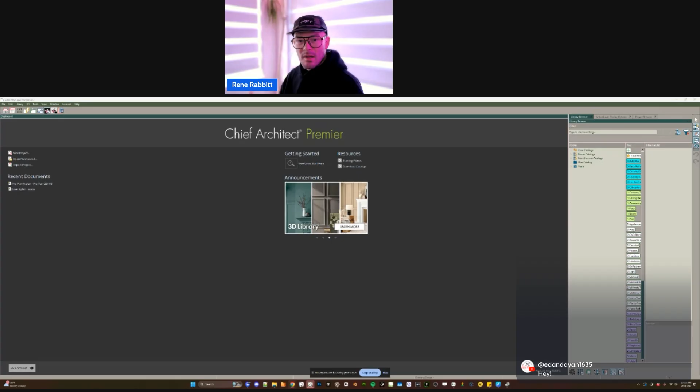Cool, so what can I go over? I'm thinking the first thing I'll go over is something I was going to keep and reserve for my membership, my paywall YouTube, but why not? I don't have anything else to talk about, so let's show you something cool that I would usually reserve for a special audience. I'm going to get in and start a little template here.

I'm going to show you something. My templates, the way I build them out, I guess it's sort of a shameless plug, but one of the really impactful things you can do in X17 is make it so that your plan file, a base plan file, is already being sent to a bunch of different sheet sizes automatically, so that when you start drawing, those different layouts are being populated. So you can have different layouts for different builders, if you will, or different layouts for different scopes if you want to.

It may seem a little complex, but all you need to do is build out a project, and when you're done with that project, gut it. Then figure out how to save this as what I'd call a template project, keeping in mind it's not technically a template. We will never go to a file menu to access this — we'd just go to our project browser and copy a project that's already built out, where we have a plan file being sent to multiple different layouts.

Now that's in a very advanced realm of figuring that out, but I wanted to lead you down that path because I just had a training call where a gentleman was discussing how to automate, how to make it so he's doing less work. This is one of those ways, because what they were doing was having to come up with a lot of different layer sets, using them to drive one layout so they could print a build set for their builders — more like an instruction set — versus their permit set, versus some kind of design review set.

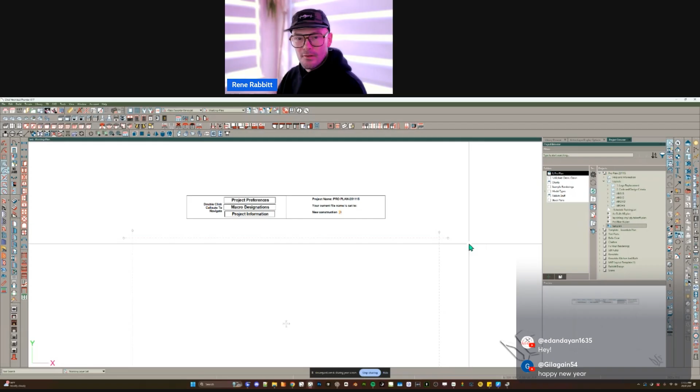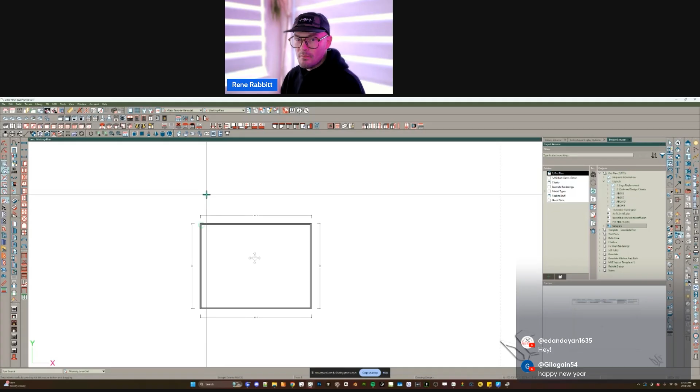So I'm just going to start with a really simple 4-wall room here. If you're on a Windows machine, I always like to mention this — I think it's such a huge tip — I'm going to use what are called mnemonic keys, and I'll take a second to explain what those are. Mnemonic keys, unfortunately, we don't have this on Mac, and we've never been able to create a workaround on Mac, not to the extent that it works on a PC.

Mnemonic keys are when I tap my Alt key — I want you to see my cursor up here, you see the top menu items. When I tap my Alt key, just tap it, don't move your mouse anymore, hands off your mouse. When you have your hands off your mouse, you tap your Alt key. Notice that all the menu items on a PC are underlined here — we've got single letter underlined words.

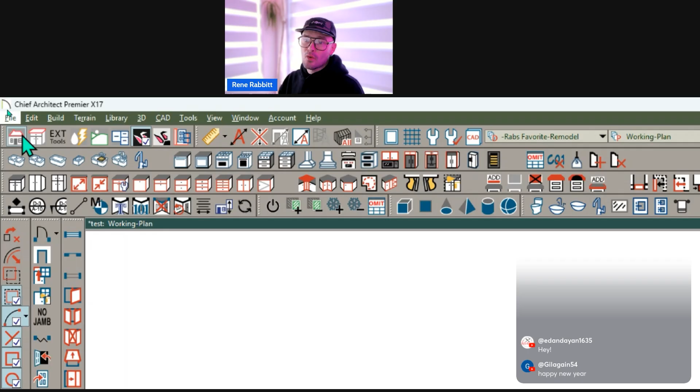So if I want to build a second floor very, very quickly without ever even touching my mouse, I could go Alt B for build, O for floor, and I could just hit enter right now, or I could hit N for build new floor. I'm just going to hit enter, and then I know if I hit enter twice more, it's just going to copy basically the same configuration from one floor to the next, and now I have a second floor. Isn't that cool? So then the next thing, what do we do here?

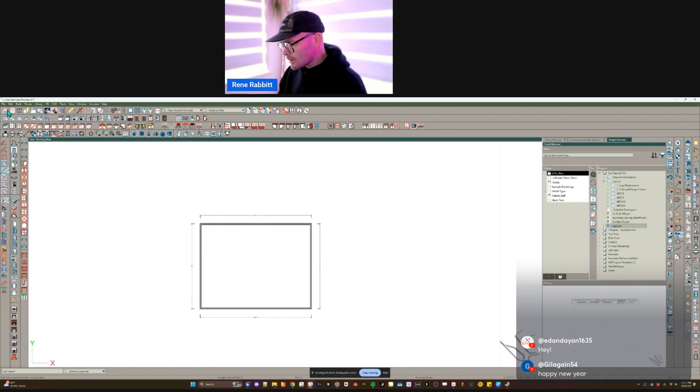We want to basically set this room up so that it's got no roof over this room, right? So we come in here in the structure, say that it's no roof over this room, and we'll press OK. And then the next part of this is just kind of setting up these walls.

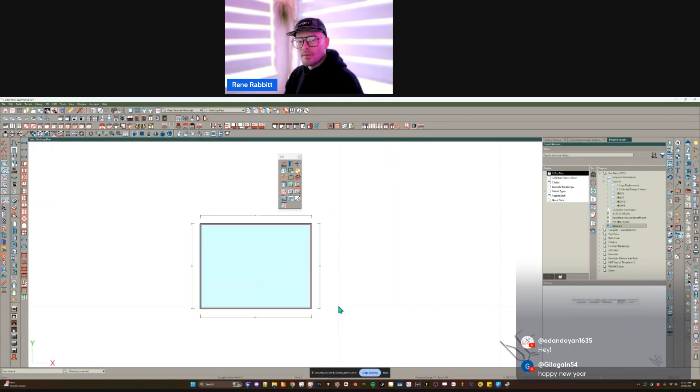Now, I'm going to cheat a little bit — I already have a tool that builds a parapet, I just want to show you how simple this is. Let me go ahead and pull a perspective overview here, and I'm going to get into my library. I want to recreate this, and I'm going to probably do a better job this time around. Here we go — I've got a little parapet built here.

So if I just spray this room, look what happens. A couple things happen that might be interesting. One is we've got a cap, and two is that we've got some kind of cant in the base here. And then three, you can see that there's some new texture being applied to all the walls and the floor. This is what's called a style palette, right? It's a room style palette.

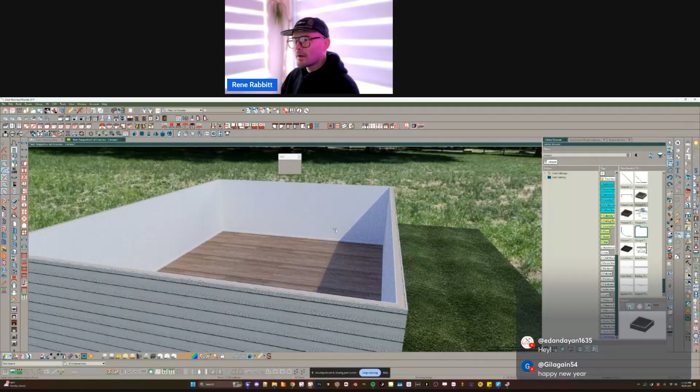So it's saving some configurations about the room, and then it's applying that as a single click action so that I get to just target a room. We could do this in 3D or we could do this in 2D. The same effect would happen if I just back out one — we can see the previous room, no cap, no wall cap, etc. Now if I go here and I'm in the second floor and I've got that tool active...

You can see this is our scope tools right here in our edit menu. My edit menu is floating in the screen. I just get to hover over this — that's my highlight color right there. Hover over this, click, and you're going to see this updates. Okay, so it works either in a 2D plan view or it works in a 3D view as well.

So the next thing is I want to make this a little bit more detailed and save this back as a new style palette.

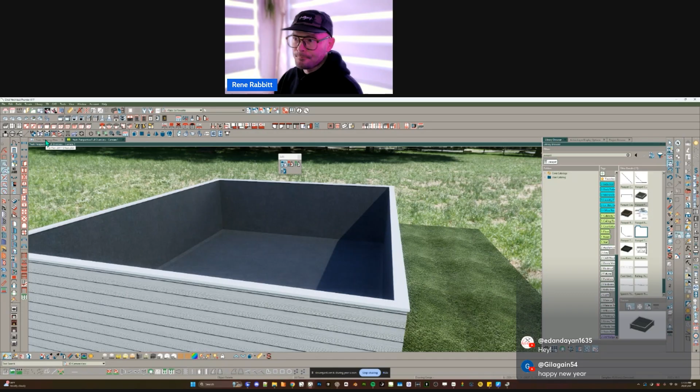So what I'm going to do is pull up a little cross section, a backclip cross section, so we can see what this is looking like currently. And then I have a parapet detail here that I can work off of.

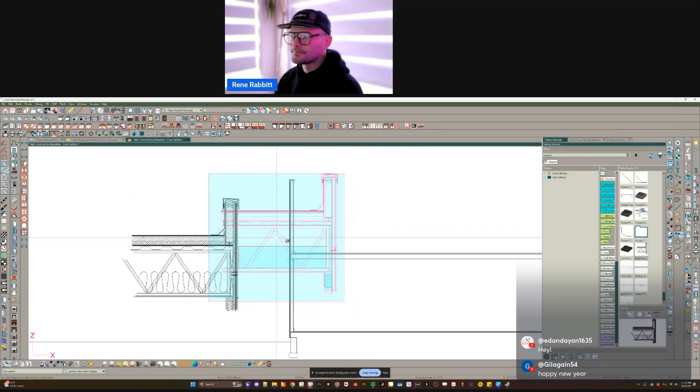Maybe I'll recreate this from these different moldings here, so we can see what was happening. There's just one simple molding in here, but we want to make this a little more complex. I might make it so we're creating all these different moldings and applying them in that style palette tool. I think we could do that pretty quickly for the most part.

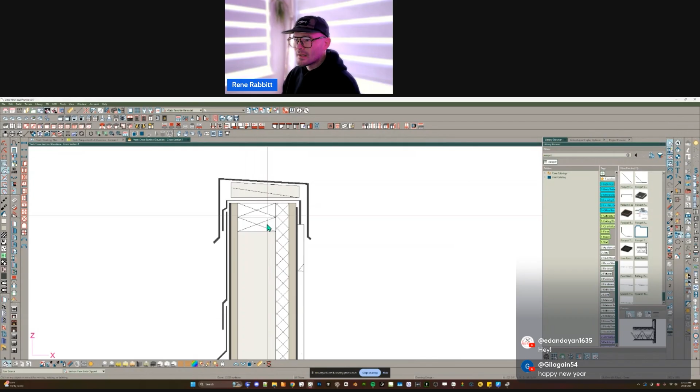Now, I'm not sure how interesting it is to see me draw all these individually, but given that this is just a CAD block detail.

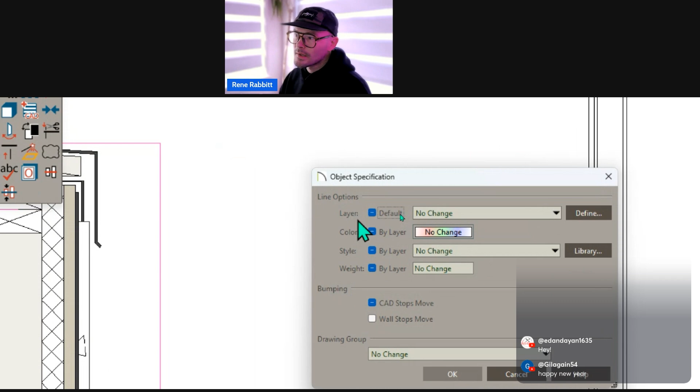I'm going to make sure that all these are set to a default layer. If you didn't know this, when I unblock, everything in that block is currently selected, so I could go here and conform the layer just by changing it. This minus sign indicates that some of the selected layers are default and some are not. If I click this once, it puts a check mark there, setting it to that CAD default layer, so now I know I'm displaying that in my current layer set.

Next up, it looks like I already have these moldings created. Now the scale of this is wrong, so I might want to mess around with the scale to try to get it to a uniform scale.

Now, I do believe I started drawing this, and I think it might be more interesting for you if I don't sit here and watch me draw a bunch of moldings, but instead power through it and explain the overall goal here. Let me see.

I think I have a series of moldings here in something I've called 'sort.' Let's see if we can find it real quick.

Talk amongst yourselves. Hopefully you guys can hear me okay, let me know if you can't. Well, I was really hoping...

I had these moldings already drawn, because that would have been awesome. Would have seemed like I planned this whole thing all along. Okay, I do have it.

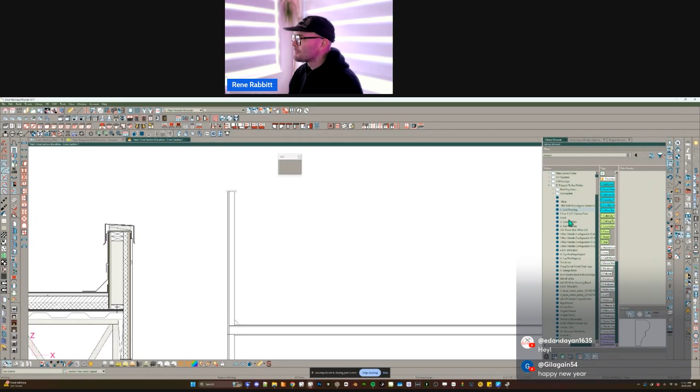So here's what I'm going to do. I have these moldings in my catalog. This would have been a lot easier if I just typed in 'mold.' Let's see what I'm typing here - molding - and you can limit your search to a specific type.

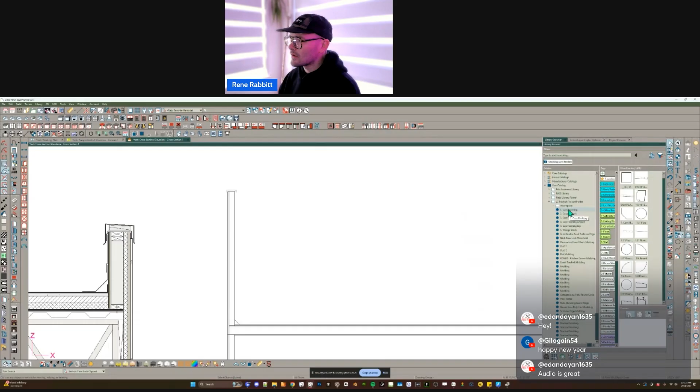If you come down here and see this icon, this is saying hey, I only want to see moldings, okay? And then I can find my sort section here, and we can see I started drawing these. I was just prepping for a video I was going to do about this.

Someone said the audio is great.

Now, if you didn't know this, you can always modify a molding profile by right-clicking in your library and saying place molding profile. This will place this as a CAD block, okay? So we can see what's happening here - so there is a cant flashing.

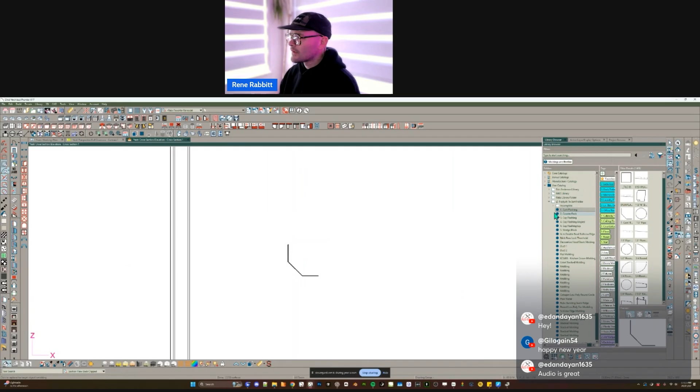I'm going to do the same thing with this counter flash just to see what this is looking like, okay? So we can see this is going to line kind of like this, right? Here's our cap flashing - that's going to go at the top.

So again, if I didn't put place molding, it thinks I'm just trying to draw a molding right now. It would draw a molding line if there was a snappable point it could work from, right? Which is a little more difficult in a cross-section view.

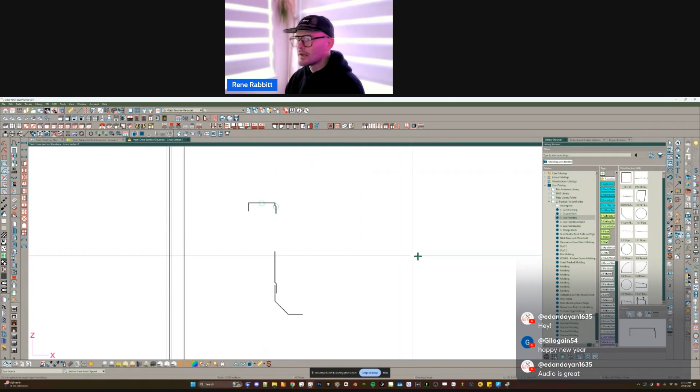And so here we go, place molding profile - just click in place, cap flashing angle. Let's place that molding profile. This one goes over the top of the first one.

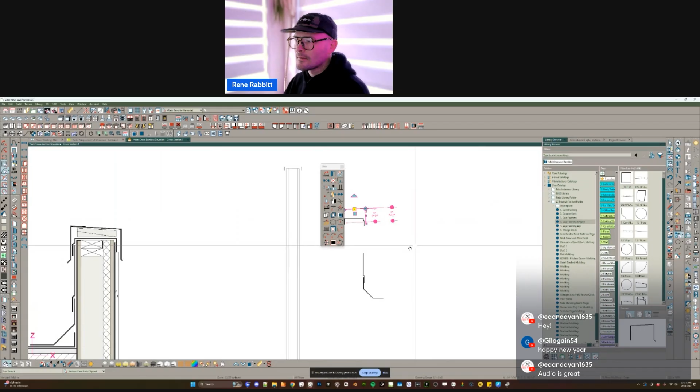Now here's the real big trick I was going to implement for this particular detail. There is no way to get a 2x4 that's been chamfered like this, cut down like this, and angled like this. So I did think maybe it would be interesting if I made my own molding profile to just look like that 2x4, because the only time we're going to see it is in a cross-section view.

So what happens if I just drew this out? Let's see how I drew this real quick. That's simple enough - this is a disconnected molding profile.

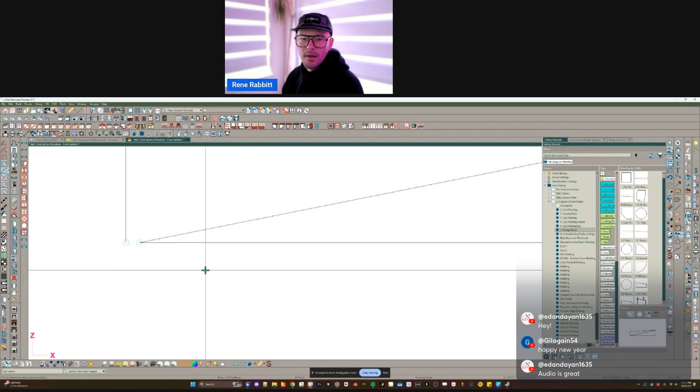You see there's a little gap here, which doesn't bother me all that much. Once we turn line weights on, that just looks like a cut down 2x4. So that works pretty well.

So it looks like I have all these drawn. What's the next step? Now we've got to figure out how we can align all this. There's some complications and some tricks to this that can be a little bit challenging. So let me get into this room specification.

I'm going to select the room, open it up, and get into the moldings section here. We can see we've got some moldings in here that we're going to replace. And I'm doing this on the fly — this is not practice, so I'm going to screw up a little bit probably.

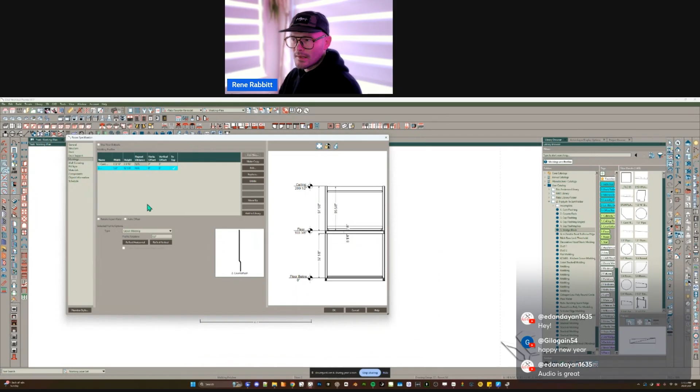All right, so now I can get into where I've got these flashings. Should be easy enough to just start by loading these in, I would say. It's automatically understood that was some kind of crown molding. It's not going to understand that this is a base molding — it thinks it's a crown molding. That's okay, we're just going to set this to base molding.

You just do that in the type section. I want you to notice this, base molding, okay? If we just left it blank, who knows? If you set it to crown, what happens?

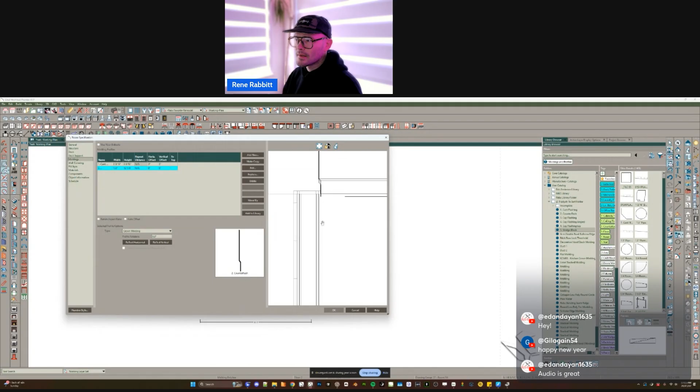When we set it to crown, it's going to place a check mark here to top, all right? And so when we get a preview of this, we're going to see that — here we go — this is how it's placing to top. We unchecked to top, look what happens. It's referencing the bottom, okay? It's still being designated as a crown molding, but it changes its origin point, all right?

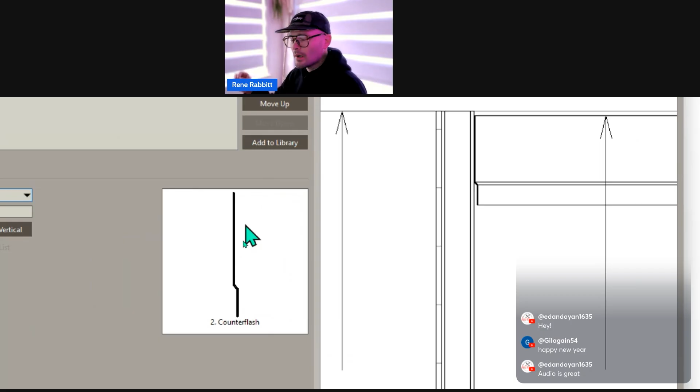So this one actually is going to be a base molding, and then we're going to change some offset. Now, another thing happens when you change the type classification. I want you to see this — notice our preview, it's just showing this molding. That's because no other moldings are classified as crown right now, okay?

Now, if I were to change this back to base molding, notice something — we see our cant flashing here. Why is that? These are both classified as base moldings. So this is a way that you can see how these are interacting with one another, all right?

And so then if I change some kind of vertical offset for this, let's just say I'm doing a vertical offset of maybe about 6 inches or something. I didn't take any dimensions here, but look at that — now I can see how this is working together.

Pretty cool, all right. Now, this is not going to be a perfect flashing setup for one very specific reason: we aren't using what are called 3D moldings, okay? We're not using a molding profile that was generated from a 3D symbol. There is a benefit to doing that for this particular molding.

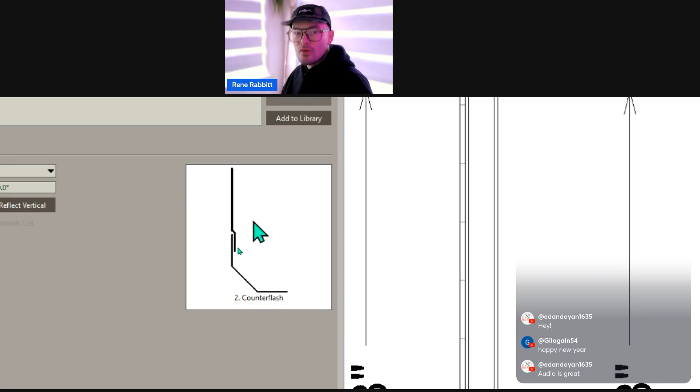When you draw a 2D CAD symbol and convert that to a molding, it cannot be stretched in any axis, separate from just being uniformly stretched just by resizing it, okay? So we can't make this upper portion here be taller without it just being skewed in every direction uniformly, okay?

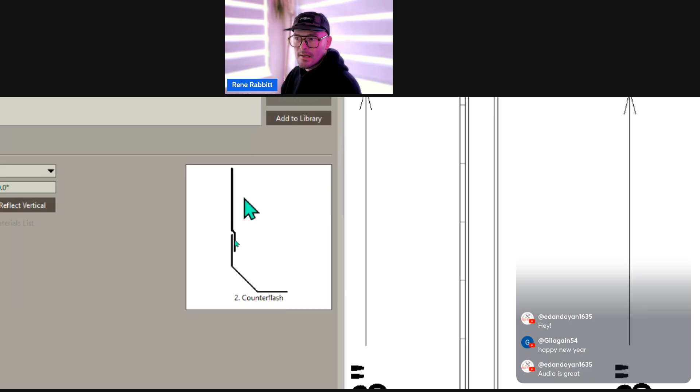If instead I were to have converted this to a solid that was maybe 12 inches long, and then from there converted it to a molding, then I get the option to put in a stretch plane. And if we know about symbols and how stretch planes work, we know that we could put a stretch plane 4 inches up in the Z here. What that would do is create a uniform cutting plane so that if we resize the symbol's height, it would stretch by just duplicating the geometry around where that stretch plane created a cut line, okay? And so that would make it so that we could change the height of this based on the height of our parapet wall. Very cool.

Maybe if we've got some time, I could show how that all works. All right, so let's get into that next molding here. And notice I numbered them — that was just to make it very easy for me to go through here one by one and just put these in place. You can obviously rename them after the fact, and that would be just fine.

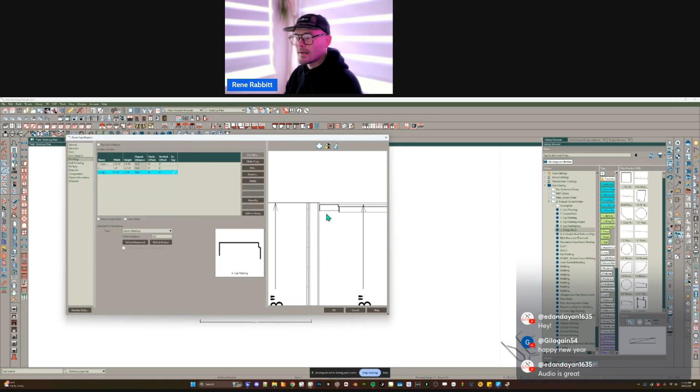So here's my cap flashing. Let me put this in. And so this one is going to be crowned, so I'm going to leave that the way it is right now. We are going to need some kind of a negative offset, right? But I'm going to leave this for right now, and we'll get to why in just a minute.

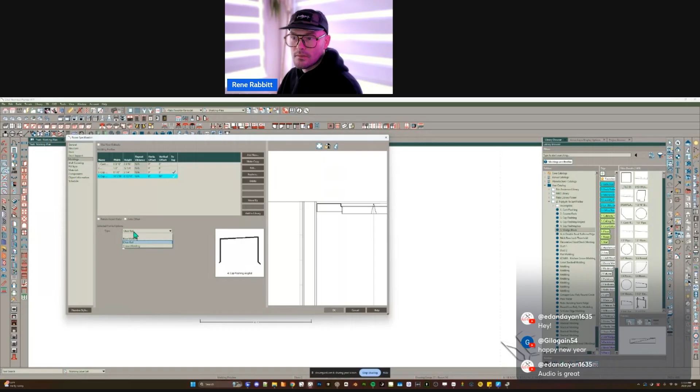Let me go to the next one, just loading these up, and I'm going to use the angle. Notice that I have one that's straight and one that's angled, so I'm going to use the one that's angled. This thinks it's a chair rail because we've already got a crown molding, so I want to make sure that it's set to crown mold. Now we can see how it's orienting itself compared to that other cap flashing there.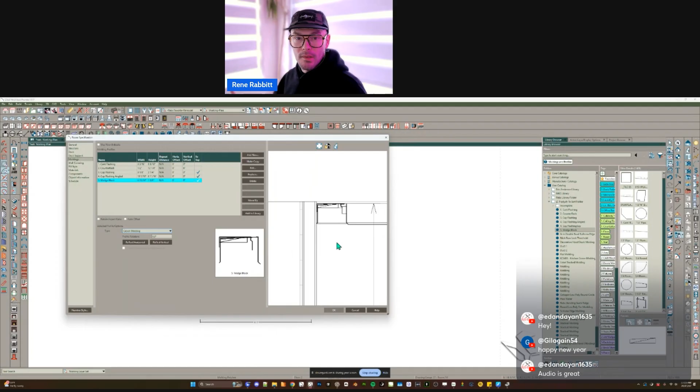And last, definitely not least, my wedge block is also going to be a crown molding. Now, how do we get these caps up above my wall assembly, where they need to be? In particular, that wedge block.

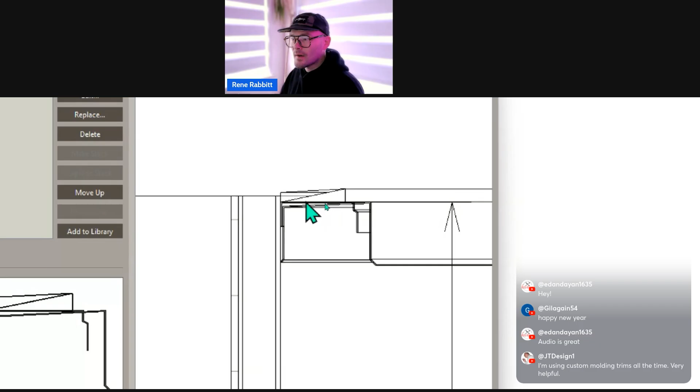So I can set this, I uncheck that to top, and we can see now that moved and changed its reference point. But I still need this to go up a little ways because it needs to sit up above my wall here. Right now it's sitting just below my wall. It needs to be up above, especially if I want that cross-section cut to be perfect.

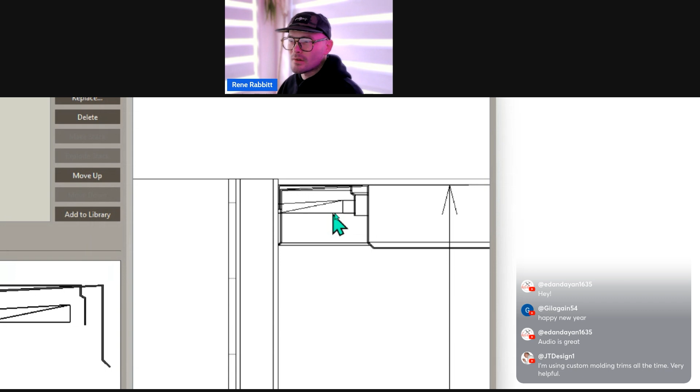So here's what I want to do. I want to create a vertical offset, so I'm going to say, hey, I want this 3 inches vertical offset. Well, look at this, Chief Architect decided at some point that we're going to flip what the offset is based on, depending on what we're working with. I still find this to be very, very confusing. It's not quite intuitive. I would love it if Chief changed it so that no matter what, positive is in one direction, negative is in another direction.

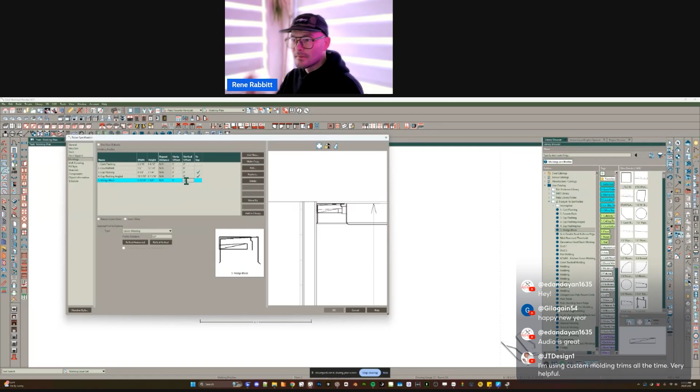So we just got to keep in mind here, when we're doing something that is considered a crown molding and you put a positive vertical offset, that means it's actually going to move in the negative Z delta. So if I want to go positive Z delta, I put -3. I want you to notice something: it moved up here in our preview, but it did not move up here in our preview in the room. That's very important to note. Why is that? Well, according to Chief, we can't move any given molding profile past the ceiling plane height here.

And so it won't move up above that ceiling plane height, and it's based about the total molding size. But there is a trick about this, we can make this work. So all I want to do then is concentrate on this preview right here - this is what's important to me. You'll see how this works out in just a second. So I'm going to go to -1 actually, and then, actually, I just want this to go just above this cap flashing. That's what's important right now.

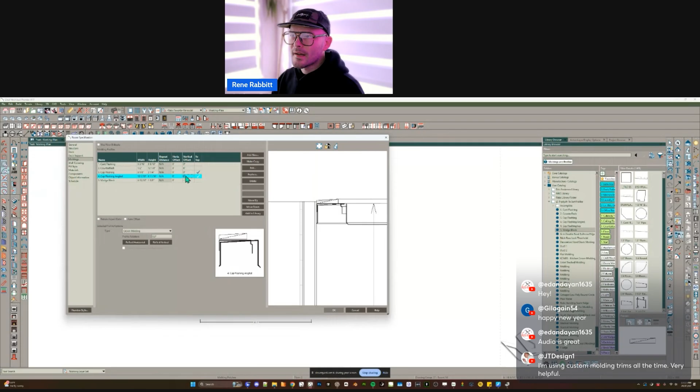And I keep losing my mouse because I'm zooming. So let's just go negative, maybe 1/2 inch. And this is just going to be a guess and check, 1/4 inch. That looks pretty good for me for what I want. If I pull a cross-section camera and look at details, I'm ignoring this other one. In fact, we could put a big offset for that angled cap flashing just so we can see it. There we go, so here's what's happening so far.

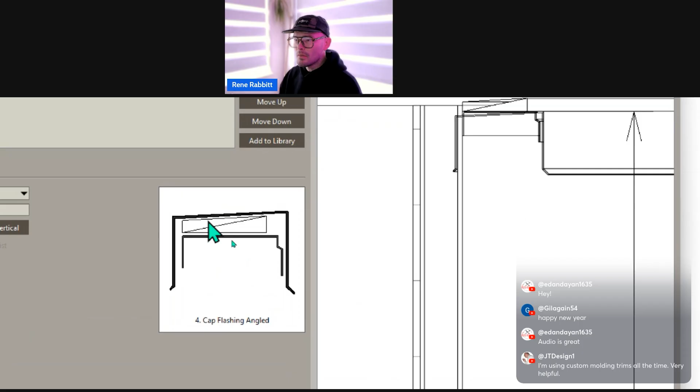Now that top cap flashing, I need some kind of horizontal offset, just a little bit here. So let's go -1 for there as well. That's looking a little bit better. And then I have maybe 2. That looks pretty dang good. Maybe I want the spacing to be a little bit more perfect here, right?

You'll be playing around with these distances, certainly. Or you could bring up a CAD detail and dimension it all out so that you have some kind of reference - that probably would have been a smart thing for me to do. So let's see, my horizontal offset, I'm going to go -7/8 instead. I'm going to center that up a little bit more, and I'm going to go -2 and 8. Oops, yeah, that worked out. So this looks pretty good.

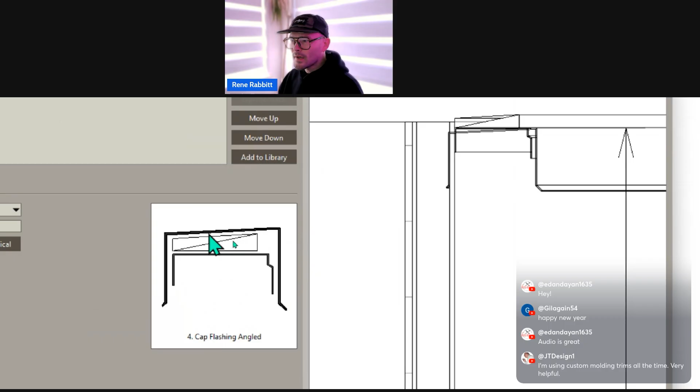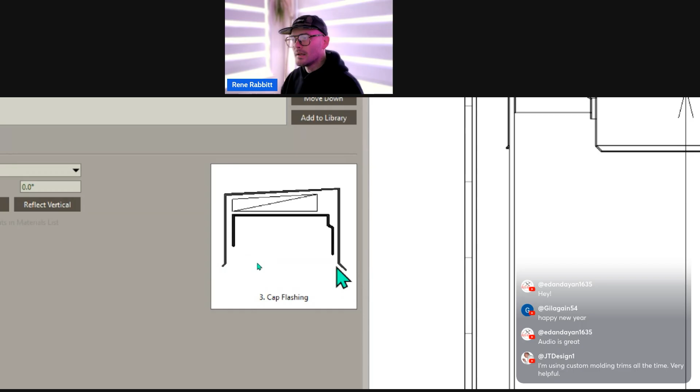Now, it looks terrible over here in our preview, and that's true. If we were to go take a look at this in 3D, this is what it would look like, not this. But the trick is this: because we have this really tall profile, and we know we can reference to top instead of to bottom, or uncheck to top, that means we can offset this based on the bottom of this profile. This whole assembly, if we were to make it a stacked molding, would reference based on the stacked molding's overall height, which means we can shift this whole thing because we've got this larger profile. Let me show you how this works.

We're going to see what happens in the preview once this all pans out. So the one thing I kind of screwed up on here is this cap flashing. Both of these, I should just reference the bottom. It's going to make it easier for me to assemble this whole thing, I think. Let's try it without.

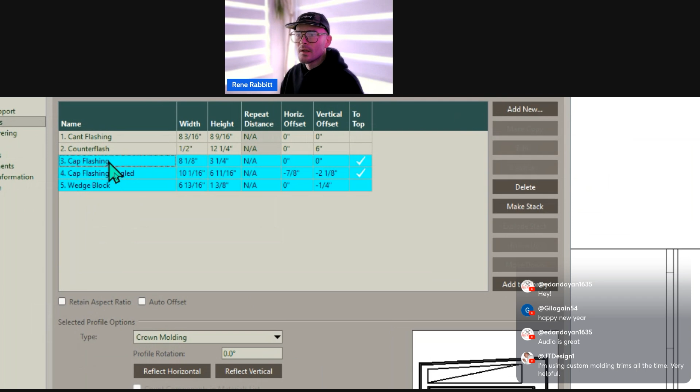Let's try it with. So I'm going to shift select all of these moldings. Select the first one, shift select the last one, right? So shift select all of these. And over on the right-hand side, I get this make stack option. So we can see what happened here. Now we've got this stacked molding, and we've got those different moldings associated with it in that stack.

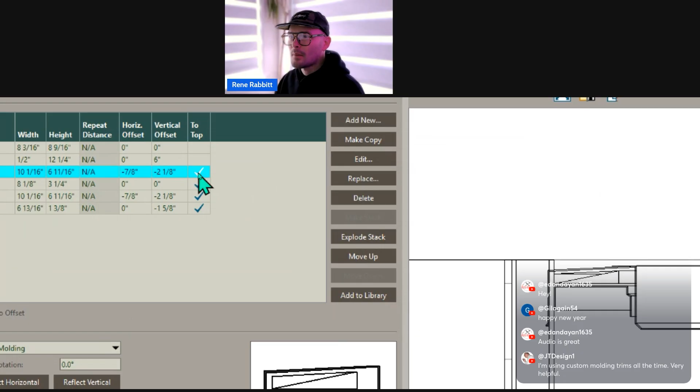Now check out what we get to do based on this stack. I want to uncheck to top on the stacked molding, I'm not going to mess with any of these settings if I did this right. So uncheck to top here. It did some kind of adjustment. Now I get to move the entire stack as a whole. Notice we got that wedge up above our wall line, which is perfect. That's exactly what we wanted.

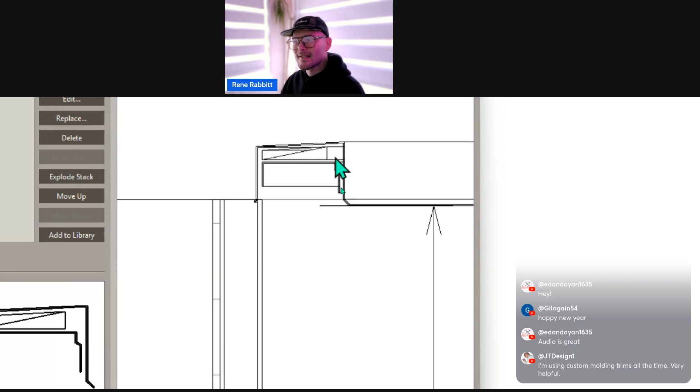Now we're kind of seeing like a mitered end here, which is why we see a little bit of a return there. That makes sense because the wall is not blocking this section since we haven't changed our vertical offset yet. I think that's pretty cool how they do that.

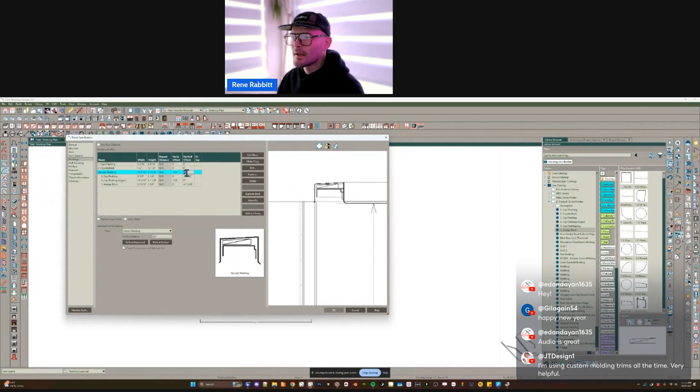All right, now let's mess around with our vertical offset. Let's just set this back to a base level of 0. I'm looking at the preview here, trying to see what happens when I drop this down. So I'm putting in a positive value to go a negative direction. See how that gets confusing, right? Let's go bug our developers about that.

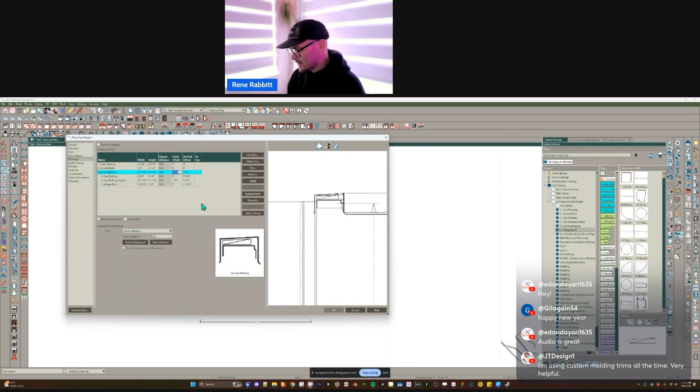So I'm just doing a little guess and check here. 3.5 inches looks about right. And then I've got to do some kind of negative offset in the X, so we're going to go something like -6, maybe -7. I probably want to change this, since obviously these moldings were set up for a different, thicker wall type. So I'm going to keep messing around with this offset, assuming we've got a thicker wall type. There we go, and that's about as good of a preview as I can put together.

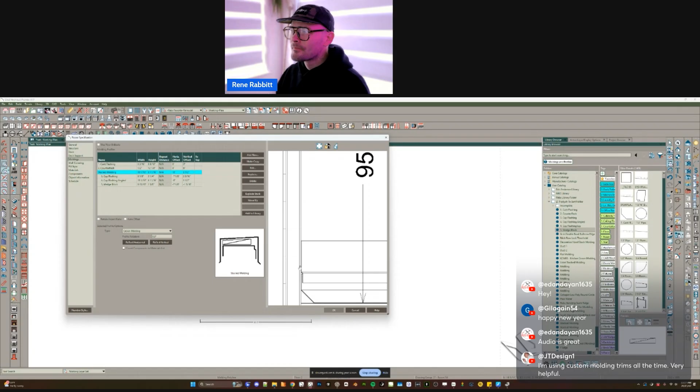All right, if we take a look at this, we've got that cant wedge right here. I could have put some additional flashing to lap over at the bottom here if we wanted to, but that's up to you. Yeah, this is looking pretty good. Let me press OK and see where we're at.

Let's go take a little look at this. Isn't that cool? So there's our cant, and there's that little step flashing that goes over the top of it. Here's our wedge at the top, right? And we can see inside here. Let's go take a look at our cross-section view now. Look at that, isn't that cool?

So when we pull this cross-section view, we do a little build all framing, a little auto detail, and throw some CAD stuff on top. That looks pretty dang sharp for the most part. You'd do a lot less detailing, especially if I had the correct wall type in here.

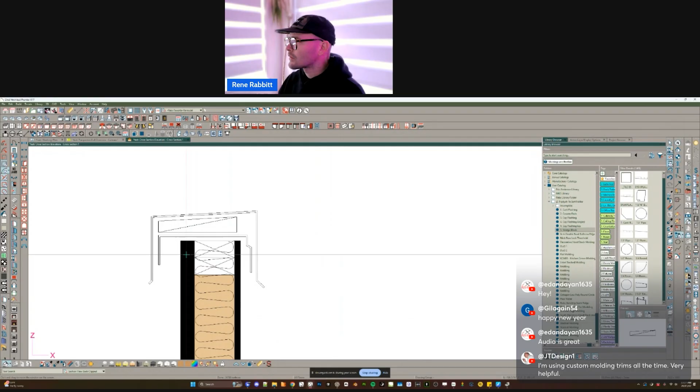So what's our next step? Well, we want to get in here and get the materials that we want built out, right? Now I'm going to build a second building here off to the right. This is just because I want to steal a particular material that I don't know where it is in my library. Bear with me.

Let me pause for a second and see what we got going on with the comments. Someone says they're using custom molding trims all the time - very helpful. Okay, yeah, I think we might have enough time to go over what I was referring to when I was talking about creating a 3D molding.

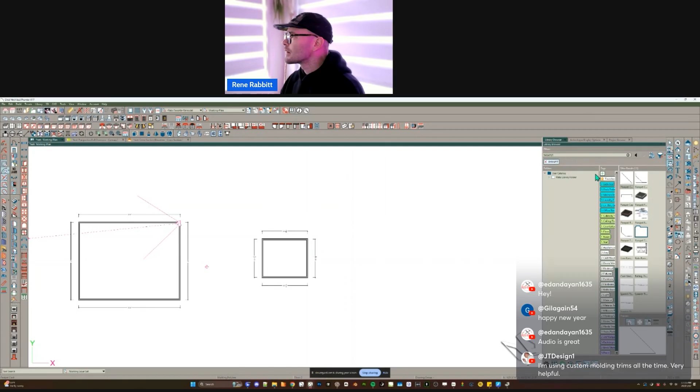All right, and then let's see, my parapet painter that's got a really cool texture on it here - better texture than this one is one I created. You guys probably know by now I make my own textures. This was just created from some kind of pebble that was scaled down, so it's got a really good 3D look. Notice this is another example of a parapet wall.

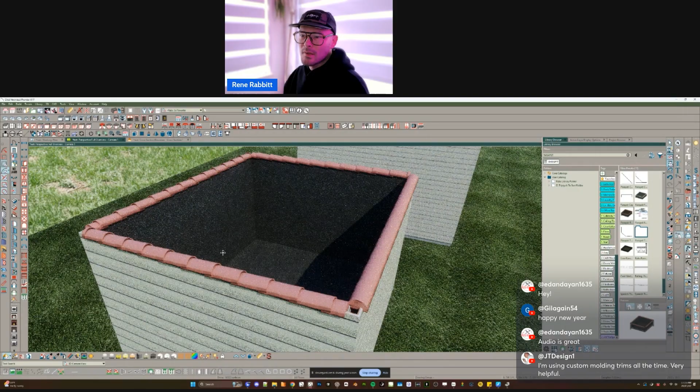Now this is one that I need to fix, because you can see here I'm using a 3D molding as the cap and it's not mitering correctly at the corners. That means you have to go manually place some things. But very cool - notice I just one click, and it applied all these effects. So I'm going to go ahead and paint in this room. In fact, we'll just change it to a room scope.

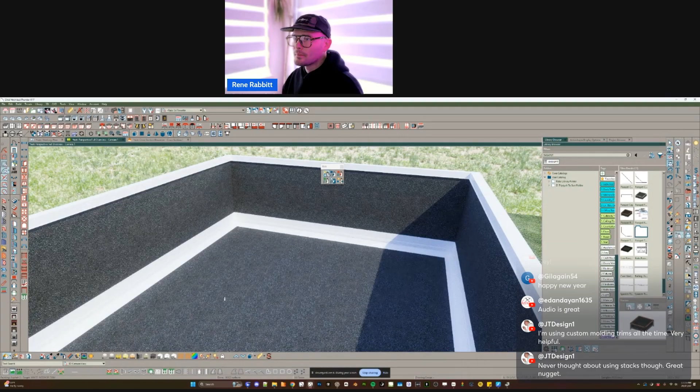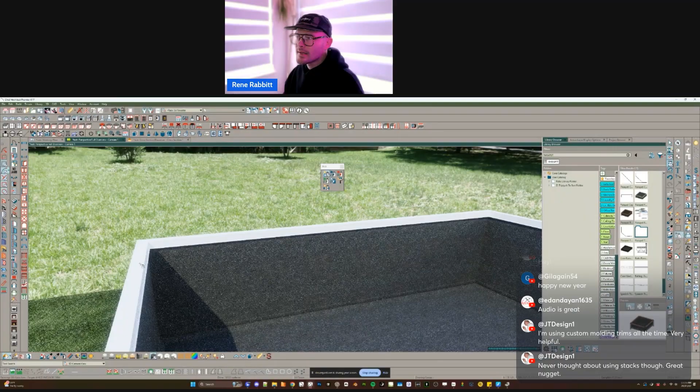Same thing, I'm going to paint my base molding here, that little wedge flashing. Although I might be incorrect, this would look a little different than this. We might actually have - oh no, that's all right. They would be rolling the asphalt over the top of that. And maybe it would have been nice to kind of take the hard edges out of that flashing that overlaps our cant. Then I've got just a black stainless steel material that I would use for everything else.

Now if you can't get in here and see these other moldings in here, just get in real tight with a little vector view or whatever and get into a cut so you can get into there and paint those moldings. Otherwise, you just got to open up the room, get to the materials tab, and change your materials that way. So this is looking pretty good the way I've got it. I'm liking what I'm seeing.

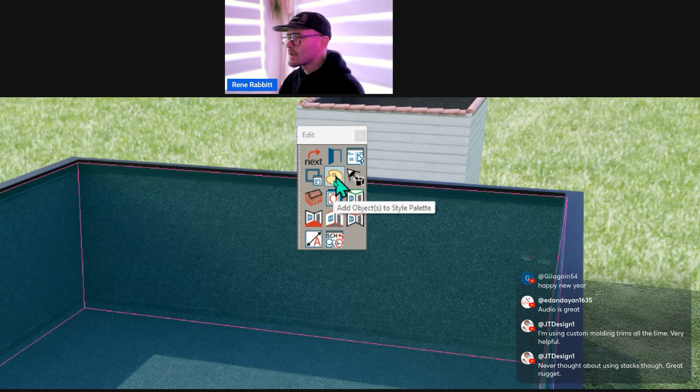So the next part is just building this into a room style palette. All right, so how do we do that? It's pretty simple, actually. You're just going to select your room, and then in your edit toolbar, which is usually at the bottom of your screen, we have this icon here. So I'm going to use this add object to style palette.

Now I teach this in my classes because there are a few little funny things you can do with this. If you were to make some adjustments to this, which we are going to do, and just want to update a base style palette, something we've already created, then you would say add to existing. Now you'll notice when I hit create new, it gives us the option to transfer certain settings, very similar to how we might use the object eyedropper tool. Instead of using the object eyedropper tool, this basically is that one-click action that gets to save to our library, whereas we can't use an object painter from a library. So this is what makes this tool so powerful.

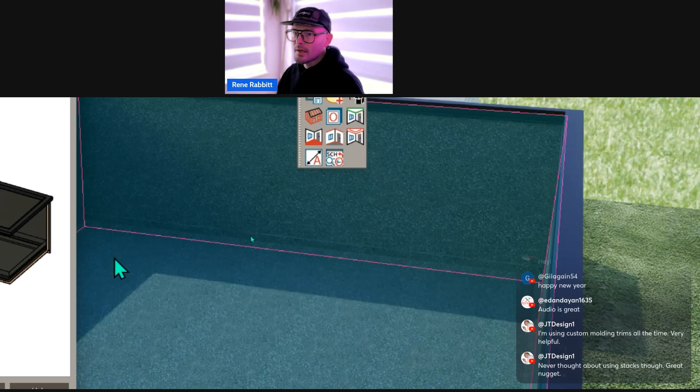So I'm going to create a new one this time around, and it's going to bring up this dialog box. In this dialog box, we have our set properties. Now it might not seem obvious, but you can just come in here and click on this, and it will open the object, for instance. So I can make edits to my style palette's room straight away from the style palette dialog box. Keep in mind, I'm editing the style palette right now, not editing the room that's in my plan.

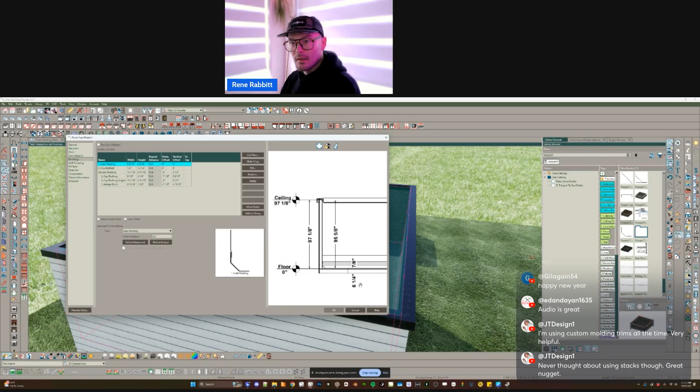I'm going to hit cancel. I'm actually going to come in here and say set properties. And this is where we can set all the specific properties for this particular room. Now, a couple that are really important are wall coverings. Chief just happens to know that this is probably what you're saving the style palette for in the first place, because that's what they built the style palette tool to do, really - to change the visual display of something. But there's a number of other settings you can get from here as well.

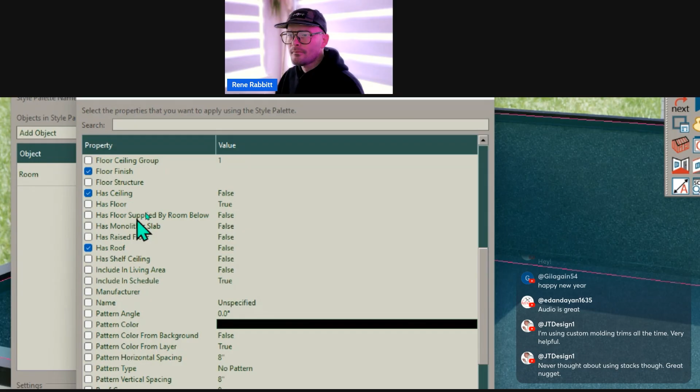So wall coverings, wall material, that's really important to me. Has roof - okay, that's actually really important to me, as well as has ceiling. I want to make sure that this thing doesn't have a roof, doesn't have a ceiling when I spray it, so I don't even have to worry about taking the roof or the ceiling off of something. Let's see, anything else here? Crown moldings, we definitely need that. Chair rail moldings, we definitely need that.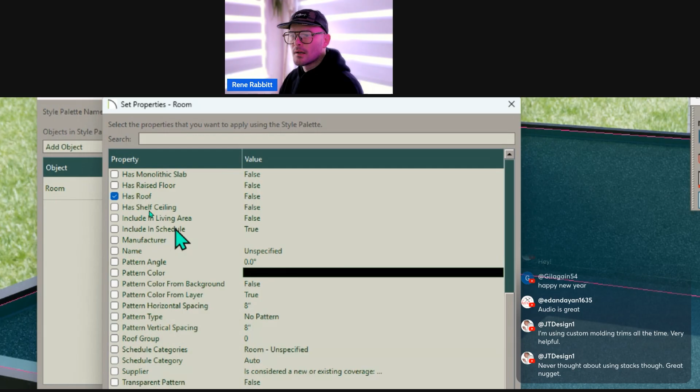And then I've got crown moldings, tier moldings, ceiling finish, base moldings, etc. If I want to, I could do a little search for material and just see what comes up in terms of found properties. So we didn't get a lot from this. It's basically just the wall material. It inherently will bring forward the molding material, even though it doesn't say that, it will.

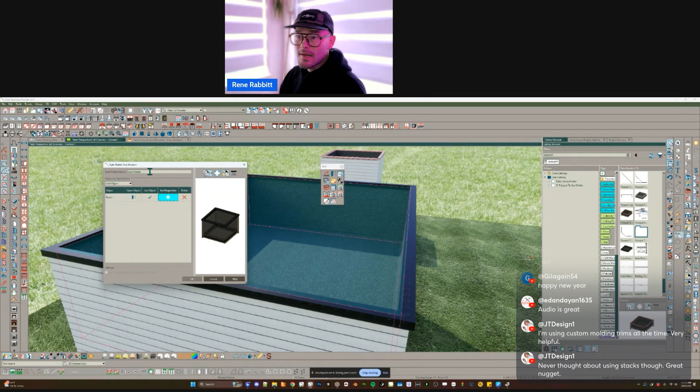Let me just press OK. And now I have this tool. We want to name this tool, out of the box it's just going to say style palette. So this is my Parapet painter. I don't know, we're going to call it number 2. Oh look at that, I had caps on.

Let me press OK. And now I should be able to take this. It's now selected in my library. When you add it to the library, it's already selected. It's the active tool basically. So I can roll over here and I should be able to just spray this room. And there we go, it's been updated. Isn't that cool? Quick and easy. Now we have this thing that can be detailed in cross-section views very easily, looks correct.

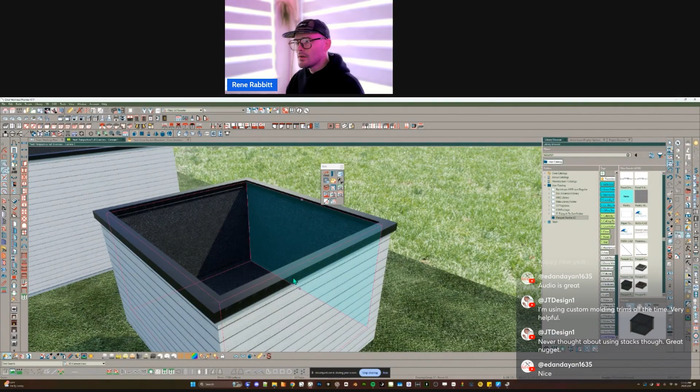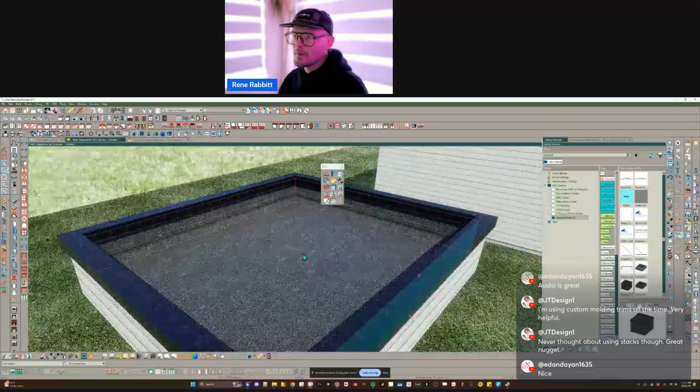Maybe kind of a last little trick here is selecting a wall in 3D and then hitting the Tab or Enter key gets you a new set of edit handles. You are now editing the room height, all right? So that if I knew what the existing room height was here, I could just drag this down by a very specific amount while dragging, hit Tab or Enter again. Polar is checked right now, and so I'm going to change the overall height of this room to 76 inches. Really, really simple for me to get to a parapet that I might actually be building, right? So this looks pretty good.

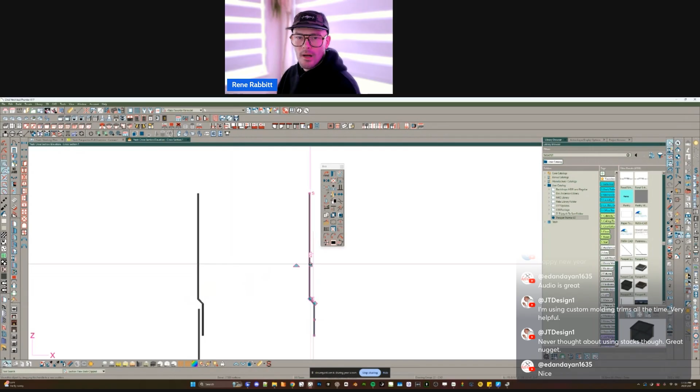And then the next thing I want to do is I want to get back to this cross-section view. And I'm going to do what I said I'd try to do, which is mess around with this guy right here. So I'm just going to make a copy of him. I don't know why I'm making a copy of him, this is force of habit. And then in our edit toolbar, I'm going to convert this polyline, and so let me convert this to a 3D solid.

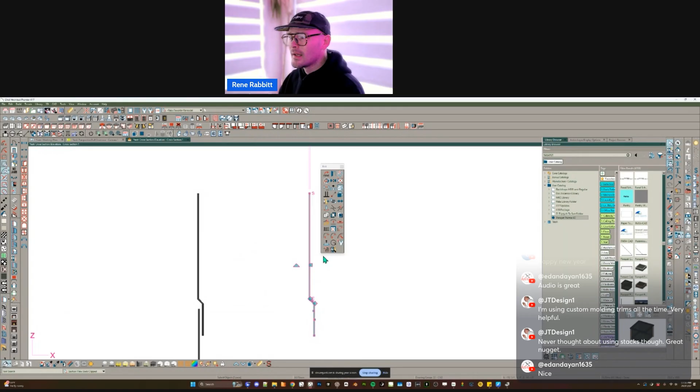Now 12-inch depths, totally fine. This is exactly what I needed. This process is going to be as simple as this. I'm going to press OK, and now I'm going to convert the selected to symbol. Okay, convert the selected to symbol. We need it to be a molding class. So if you didn't know this, we can convert a 3D object to a molding. If you didn't know this, we can convert multiple 3D objects to one single molding.

Why is that important to know? That means multiple objects can have different material classifications with them. We could have exploded this shape, we could have exploded this 3D solid, making it so that we could paint every surface of the solid a different color, and then selected all that and created that molding, all right? So this gives us the opportunity to give us other UV mapped coordinates on one single molding profile. You got to think about that a little bit to understand the full scope of what you can do with that, okay? For instance, I created a sill profile, which is row-lock brick with a threshold. That's one molding, so it can get applied as a sill.

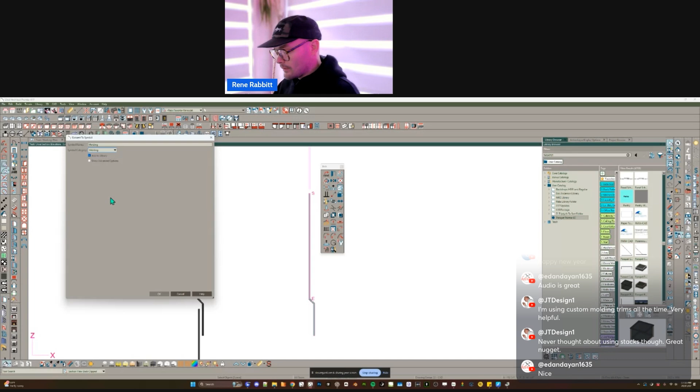And the other thing that we need to note about converting a 3D object to a molding is we get the parameters of setting some kind of XYZ offset, so that the molding, even though it's placed on a particular molding line, could be offset from that line, meaning that we can get a lot of dynamic symbols pushed in automatically into your windows and doors that have specific offsets to take care of unique architectural features. This is getting into the weeds, but I just wanted to, rewatch that, write it down maybe and get an idea of what you can do with this. It's a very powerful method, is turning some kind of 3D object into a molding profile.

Now I do want to show advanced options. All right, so I'm going to make that check mark and then press OK.

And you can see what's going on here. It's repeating itself, but not in the way we want it to, right? That looks pretty messed up.

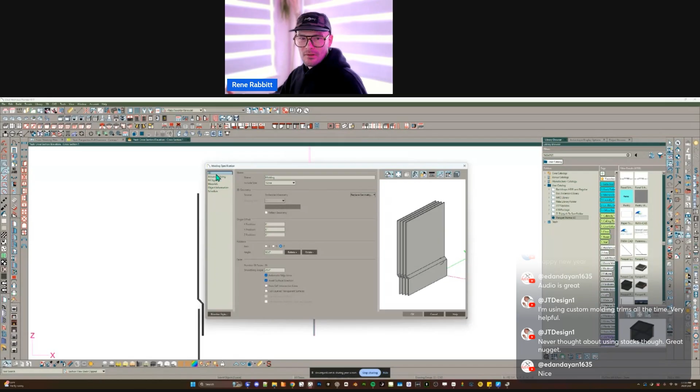So we are in the 3D panel. Please note that in this convert to symbol dialog box, it looks very different from other symbol categories, like your fixture symbol category, your furniture symbol category, your electrical symbol category. Now the electrical symbol category obviously looks a lot different from other categories as well, because we have the opportunity to specify something as a light. But this one's very different in that we're starting with the 3D panel right off the gate.

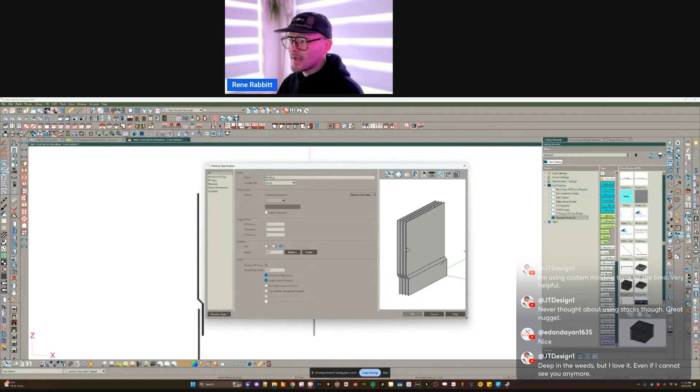So we can see here, we want to do a rotation in the Z-axis. Why the Z-axis? Because if we take a look in the preview over here, we can see that this is our Z leg, so positive. We're always going to mention this because I feel like this is a hard thing for people to learn at first. So all these legs represent a positive direction, okay?

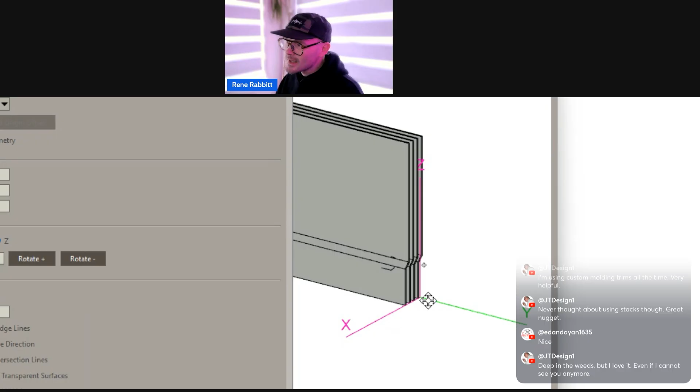Now, if I want to rotate something, I like to think of it as like a trapeze artist, right? So in this case, I want to rotate this as if my trapeze artist was flipping around this Z pole right here. That's his pole, and he's just going to be flipping around like this. So I'm going to rotate this about the Z.

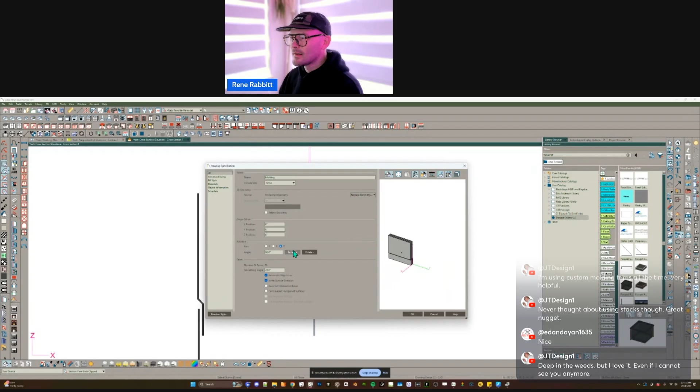So I leave it at 90 degrees. That's fine because you can click rotate a bunch of times, but watch what happens. The way this repeats itself right now, watch what happens when I rotate it 90 degrees. Look, now it's repeating itself in the way that I really want it to, okay? Isn't that funny? Rotate this way, it's stacking them up like a bunch of plates. Rotate this way, and it's stacking them end to end. That's perfect. Now here's where the magic of this particular symbol is going to happen if I do this correctly.

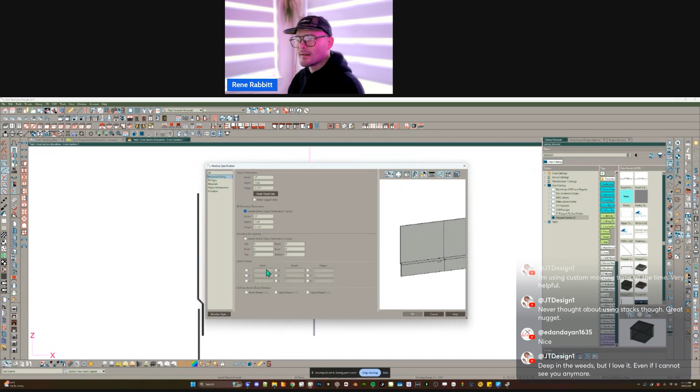I do want to mention that I've gotten so far into these kind of symbol modifications that I know there is a known glitch when you get too far into the advanced sizing panel. I don't think we're going to run into it though for what we're going to do here. But sometimes if we've got a bounding box spacing update and a stretch plane, there's a glitch that is extremely complicated for them to work out, and they've been working on it for 3 years.

All right, so I'm going to put in the stretch planes section, I'm going to put in a height stretch plane. And so we can see here, just by checking this box, we can get in tight here, is that's indicating our stretch plane. That's our cutting plane, okay? So I actually need this to move up like 4 inches or something like that.

What does this mean now? That means where that stretch plane is, it's just like a slice. It's going to take that slice, just like we would do a cross-section cut, and wherever the geometry meets at that slice, it will reproduce that same geometry. It's basically like applying a 2D CAD molding. It's that 2D CAD molding, exactly the way it works in Chief Architect? We're taking that as a slice and we're repeating that geometry over and over and over again.

Right, so that's all we're doing with the stretch planes. We're cutting through that section, and that means when we change the height of this symbol, it will just continue to reproduce at that cut line, okay? The same geometry of that slice. It's really hard to explain that. Maybe I should chat GPT it one of these times.

So now that I've got this all set up, the next thing I want to do is get to the materials tab, and where it says concrete, I might want to go select that material that I really want this to be. Or usually something that's prudent in this scenario is that you get into your material defaults and you set this up to be your material defaults. So I could have this automatically be set to whatever the fascia color is for this project, which I'll do for this, that's fine.